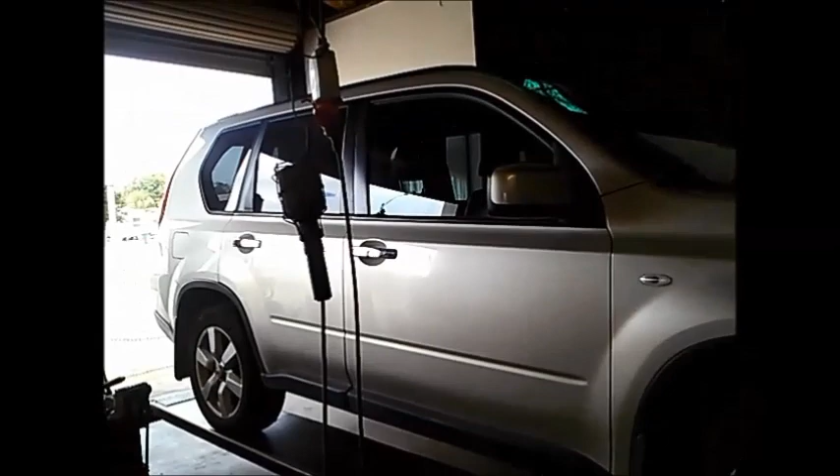Today we've got a Nissan X-Trail CVT transmission with a problem. It's sort of surging through the gears. It came in on the tow truck, so what we're going to do now is see if we can get any codes out of it.

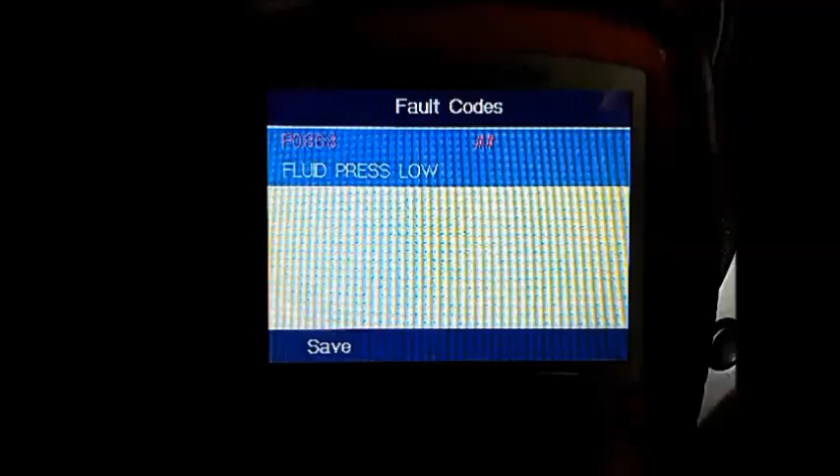The OBD2 plug is just here, next to where the fuse box is. And we managed to get a fault code, a P0868, fluid pressure low.

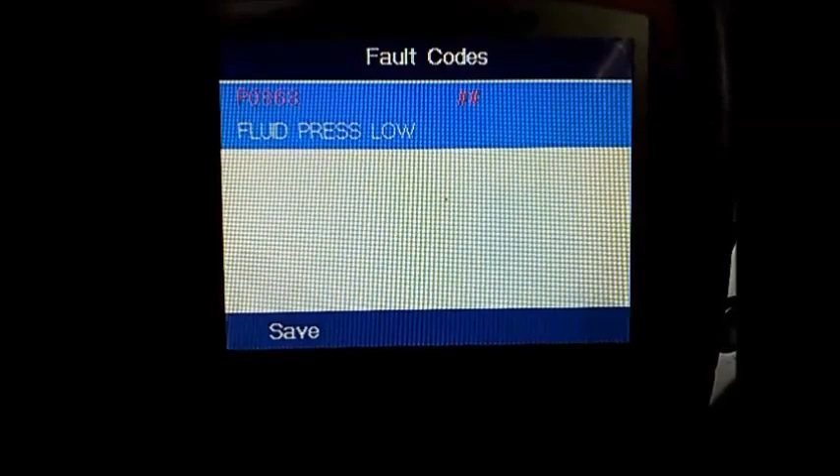Now to check the oil level on these, there's a little clip on the dipstick. You just have to press that in and then it'll pull out. If you're working on it, you just turn it by 180 degrees so it doesn't keep getting stuck in the little clip. When you finish the job, you just clip it back in. These also take a special CVT fluid in case you need to top it up. You can't top it up with any transmission fluid.

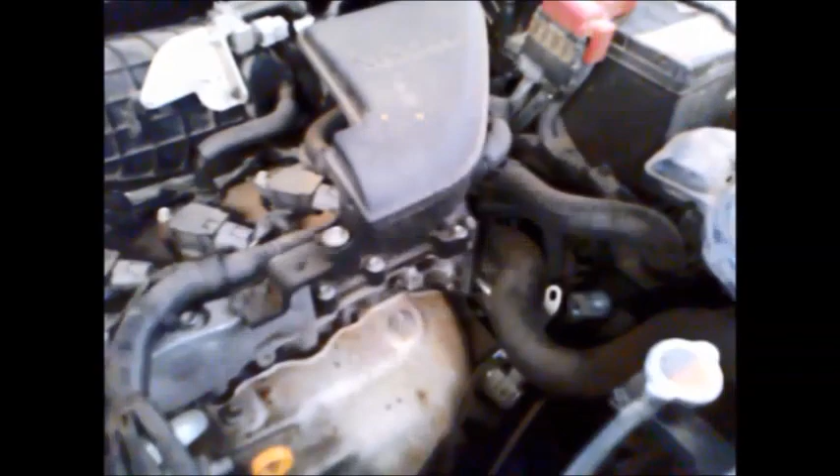Now just to show what's going on, it's a little bit hard to explain, but I can show you what it's doing. When it's under slight load, it's jumping through, so that's what's happening. Something inside is just pulsating instead of being applied constantly. So we'll just put that back into neutral, and in reverse we're getting the same problem.

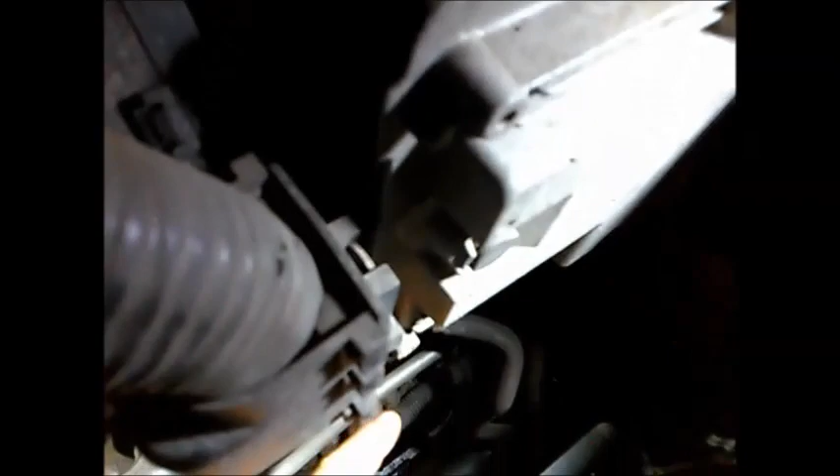So I've just removed the little cowling there for the air filter, and if you have a look under there, you've got these little bolts here. They're actually pressure ports where you can test the various line pressures, pump pressure, clutch pressure, etc. I'll show you on the diagram in a moment.

Just above here, it's a little bit hard to see, just where my finger is, that's the little oil cooler. It's a water oil cooler, so there's water circulating through there, and because we've got a code of low line pressure - there is actually a little filter in there that, because they're so difficult to get to, quite often gets neglected. If that filter is blocked, because CVTs create a fair bit of friction material, that's going to restrict the oil flow through the cooling line as well.

So before you go ahead and pull it out and all that, it's worth definitely dropping the pan, having a look at the inside of the pan, the condition, cleaning the filter there, and also just replacing that filter. You can do pressure checks there, but until you've done all that, you can't really test the pressures in it properly. So anyway, I'll just show you on the diagram what I'm talking about.

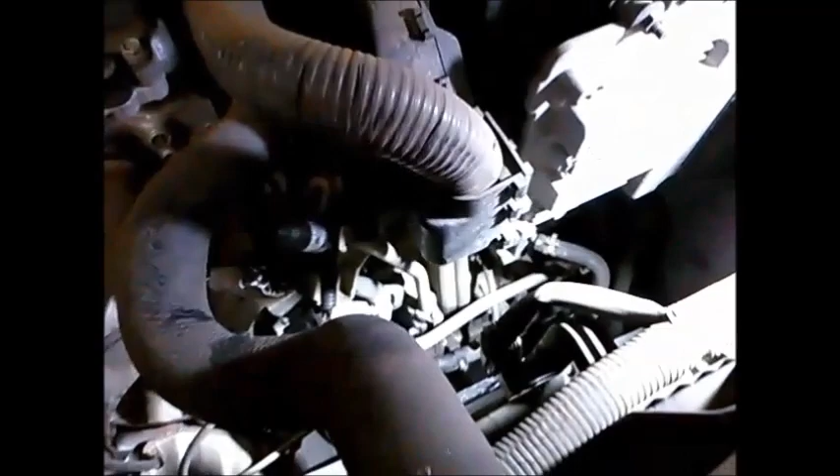Here I've taken the wheel off and just removed this plastic stone guard just to gain better access to this cooler. You can see there are 4 little bolts there, so we're just going to remove those and pull the filter out.

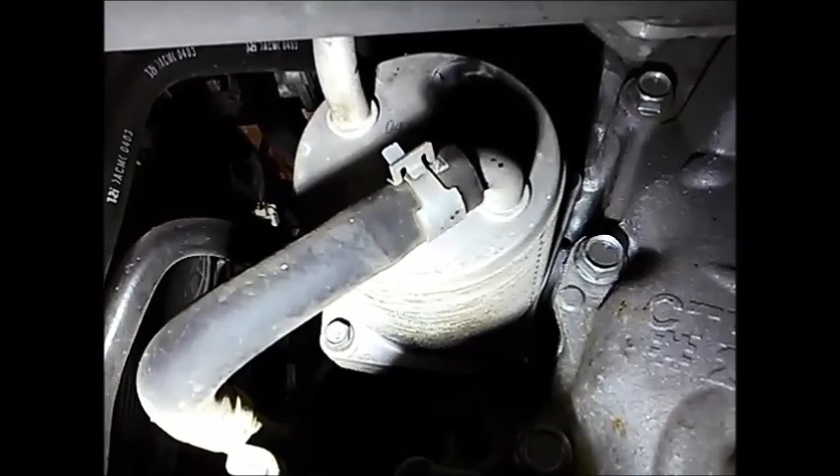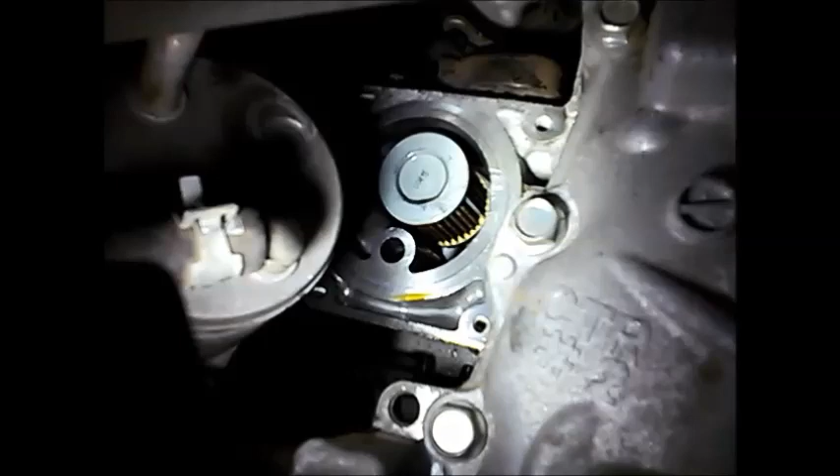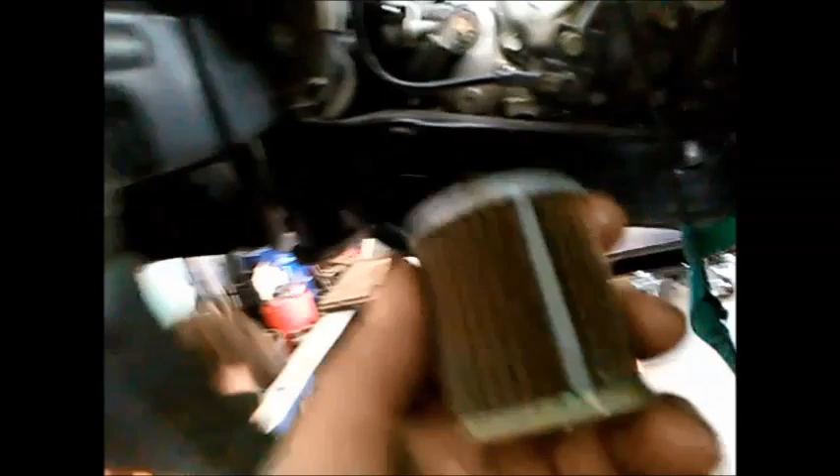There you go, just taken that off, and you can see the little filter in there behind that - there's a better shot of it - and that filter just pulls out. Just be careful not to damage those mating surfaces with a screwdriver or anything if you're fiddling with it, and make sure it's nice and clean before you remove it. And there we go, a little filter, that's what it looks like.

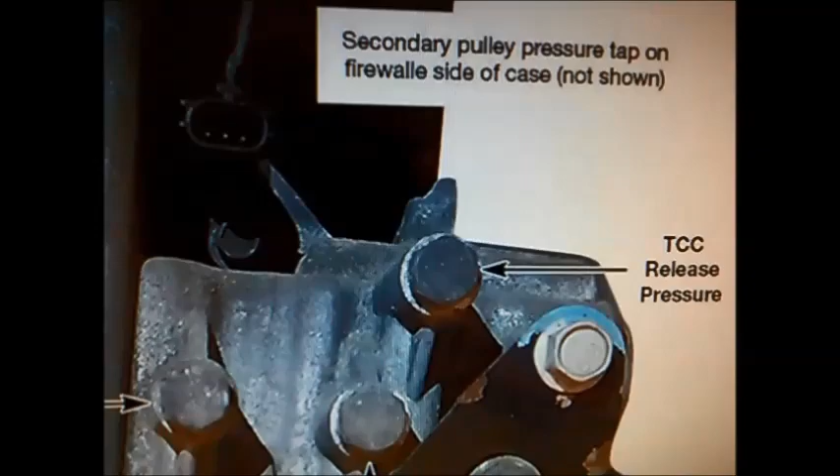Now here's the Sonnax website that you can look up yourself. You've got the line pressure one, which is that one. Forward clutch pressure, primary pulley pressure, torque converter clutch apply pressure, the torque converter clutch release pressure, and the secondary pulley tap is on the other side - you can see up here it says it's on the back side, or the rear side of the case. The reverse brake pressure tap's on top of the case. So that's the location of them, just for reference.

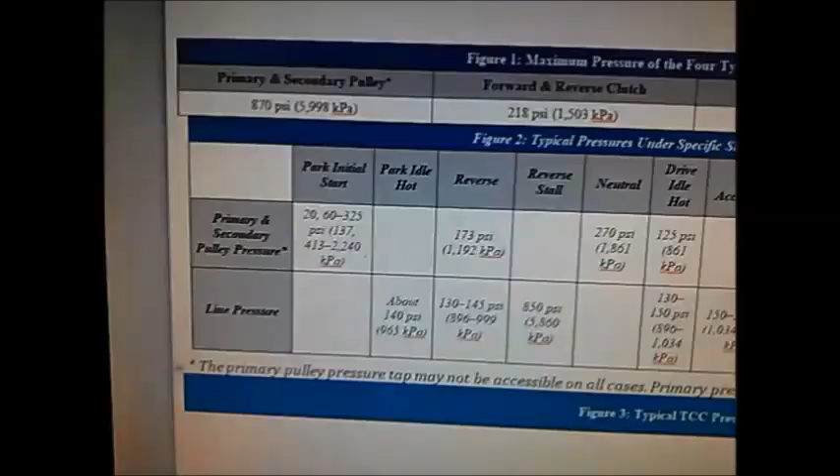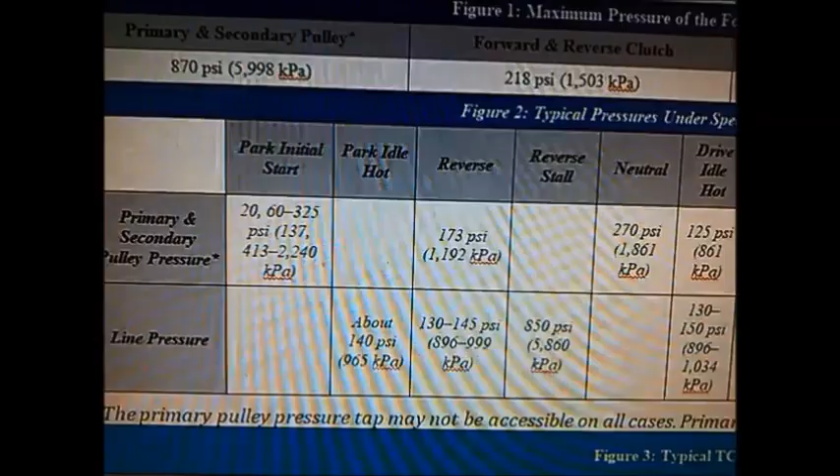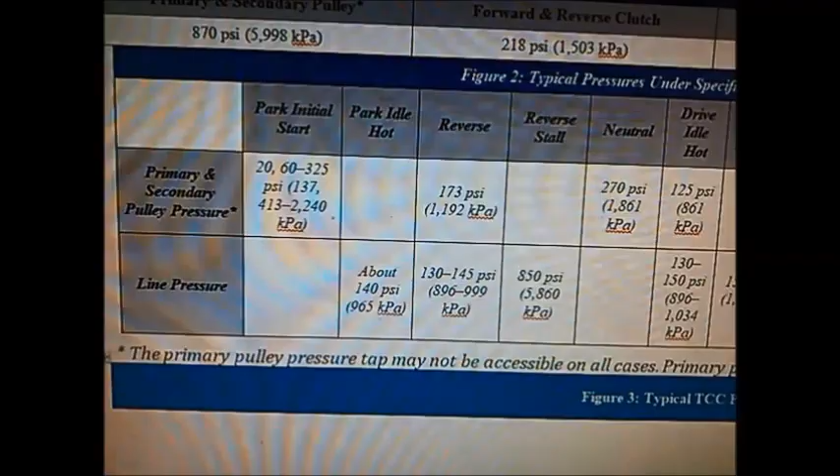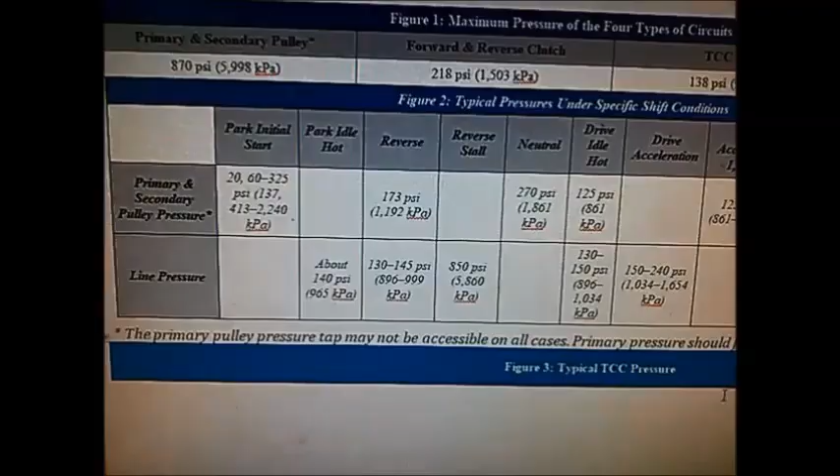And here we have the line pressures, and you can see if you do a stall test, which basically means you put your foot on the brake, put it into reverse or drive, and hold the accelerator flat to the floor, you'll achieve the stall speed of the torque converter, and you can see that the pressure there reaches up to 850 psi. So just make sure if you are testing those pressure ports that you've definitely got a gauge that can handle those sorts of pressures.

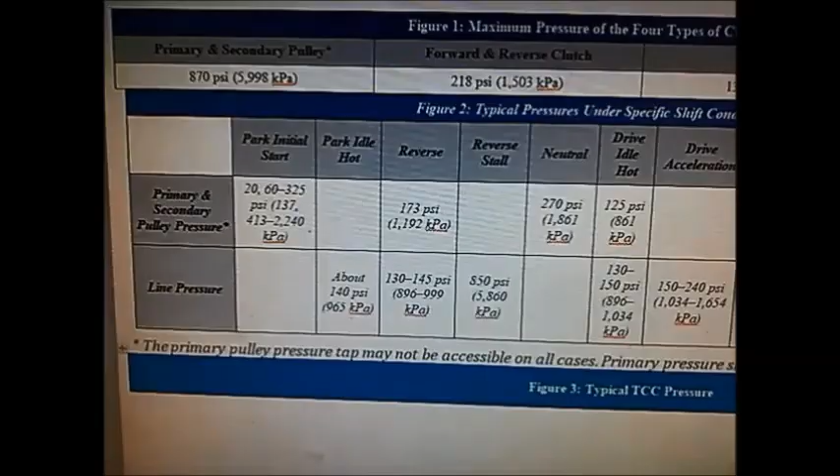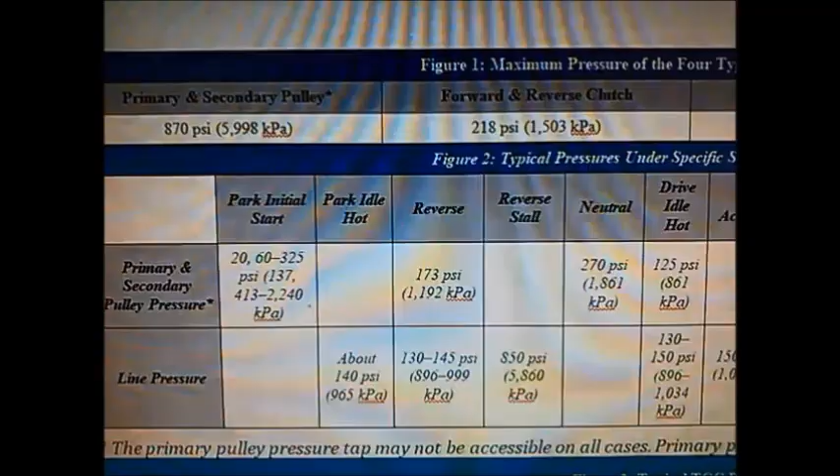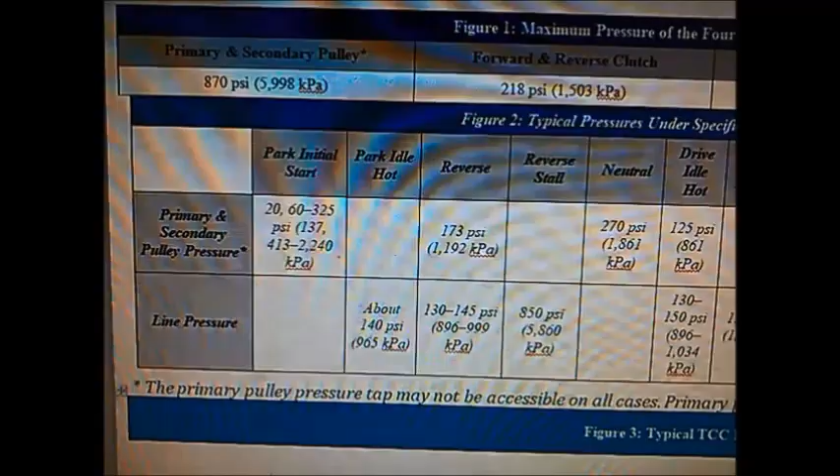It can be dangerous as well, so make sure you have all the protective gear and that. But anyway, you can see what pressures - the line pressure you should be getting about 140 psi in park at idle with the engine at operating temperature, and in reverse you should be getting 130 to 145 psi pressure just idling, and so on. So I'll just hold it still on the first section here, so you can freeze frame it if you want, or you can just go to the Sonnax website

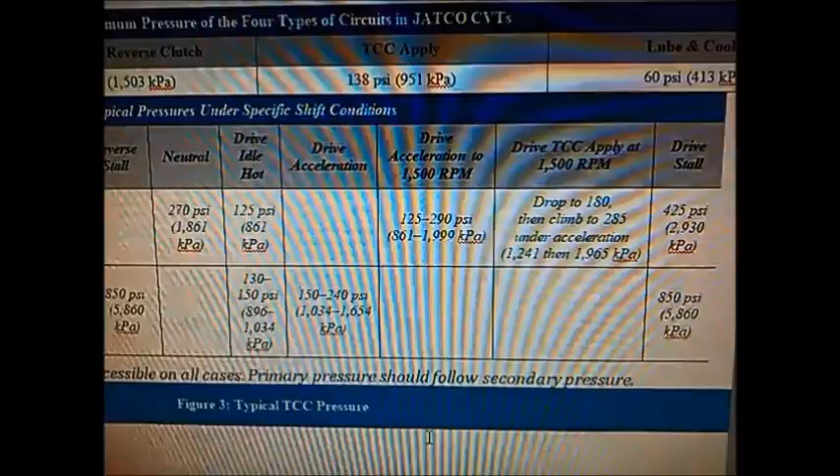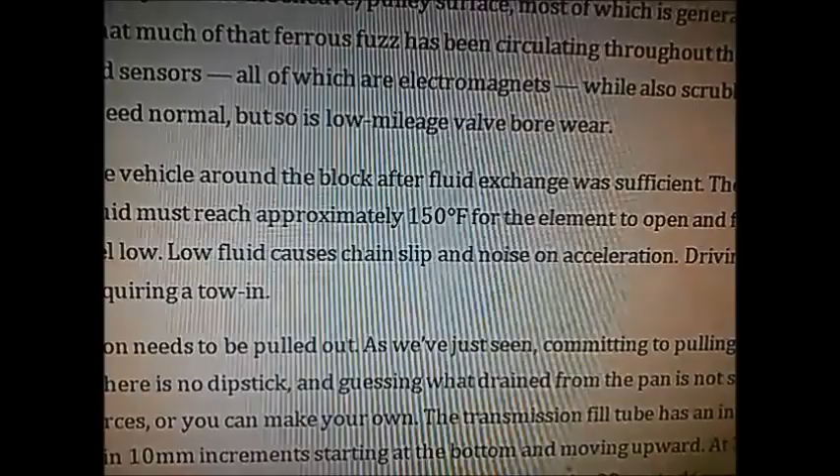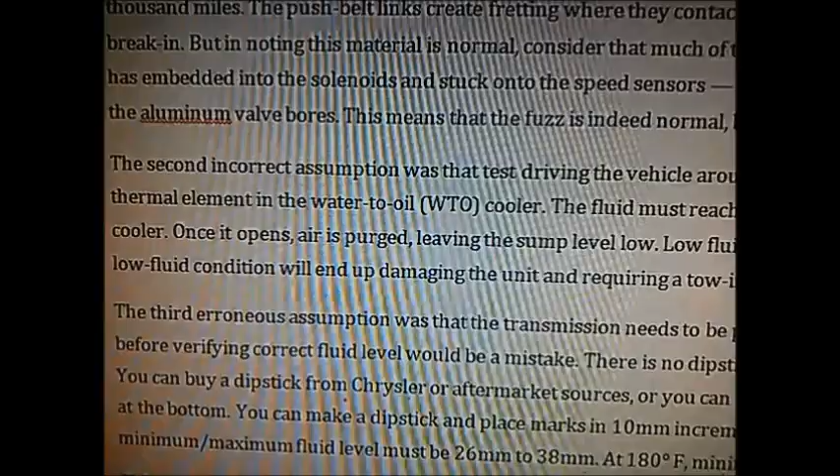and punch in this information as well. And here's also the information that I mentioned earlier, that the fluid must reach 150 Fahrenheit, or between 50 and 80 degrees Celsius, to open the element in the cooler. So you purge all the air out of it. If you've done an oil change or anything like that, you've got to make sure that is done. So you've got a few little things you can check before you start pulling the transmission out anyway.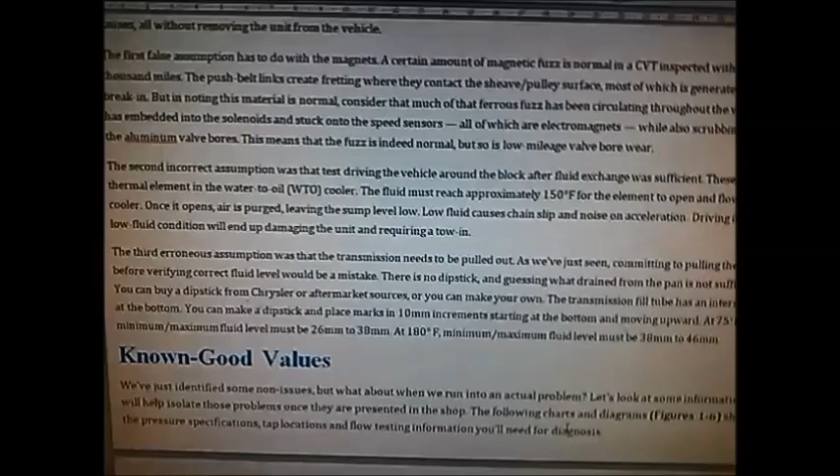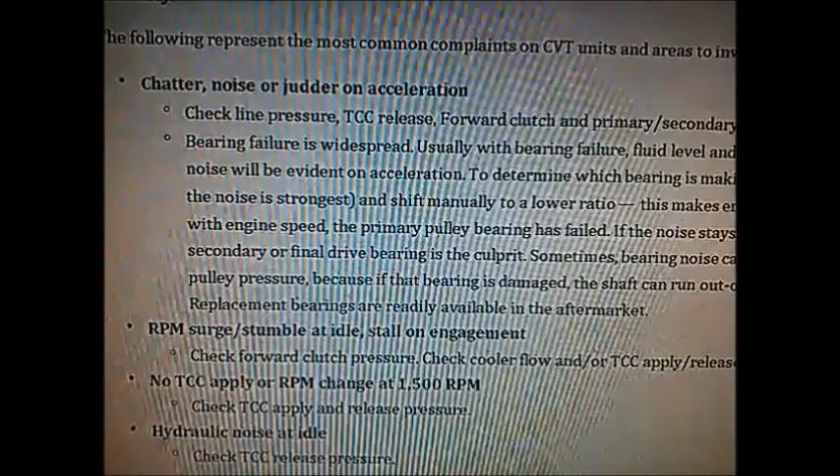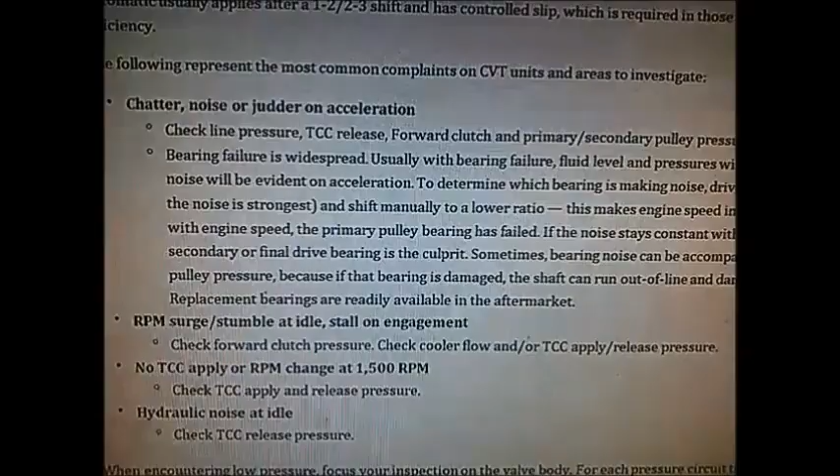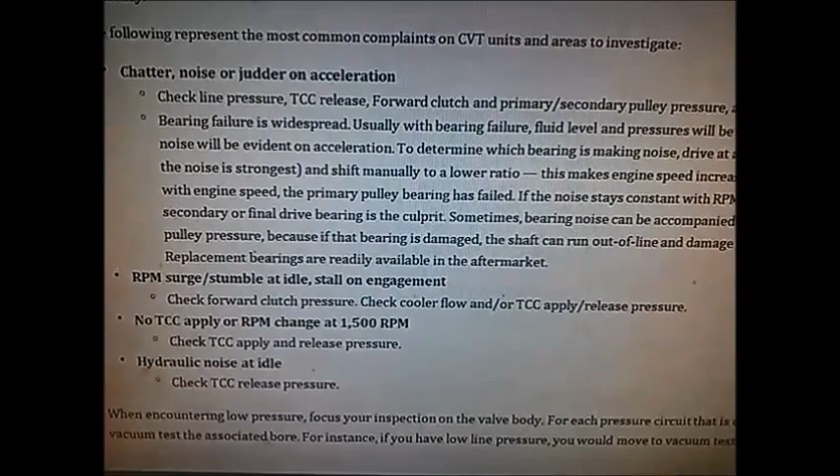Anyway, I hope that's helped. We're going to go ahead and do these checks and see how we go. And here again, you've got diagnostics information that'll tell you to check certain things if certain situations are happening. We've got this judder on acceleration under load, so it tells you a whole lot of stuff. Basically it tells you to check everything, but until you've checked those filters and made sure the cooling line has a good flow, all this information is sort of irrelevant. So anyway, I hope that might help you fix your CVT problems if they arise.

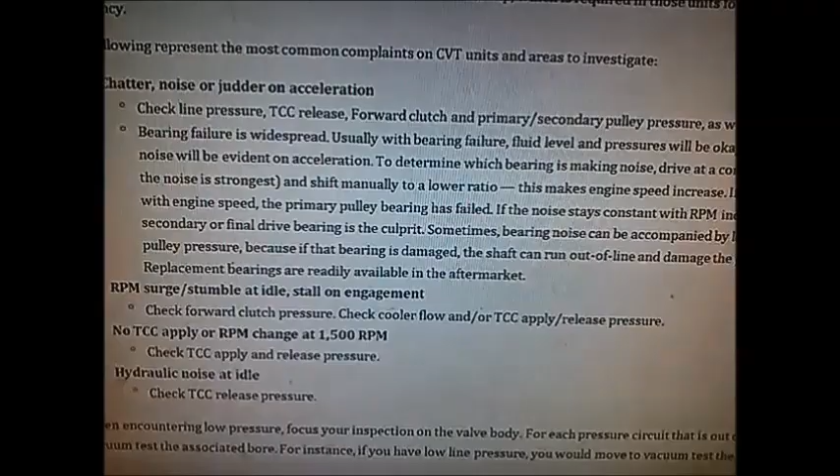Thank you for watching. Okay, so we've tested the pressure in it. The pump's notorious for getting worn in these transmissions, so we're just going to go ahead now and remove the transmission.

Take these out. And those. Those. And these out. And these two there. Blah blah blah blah.

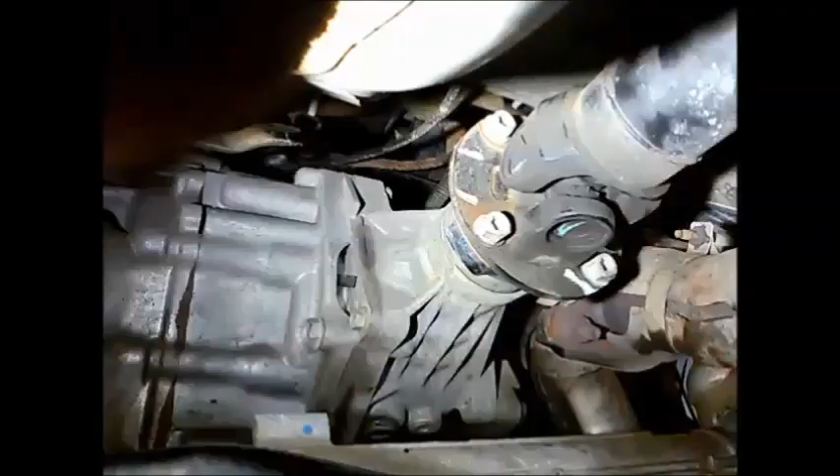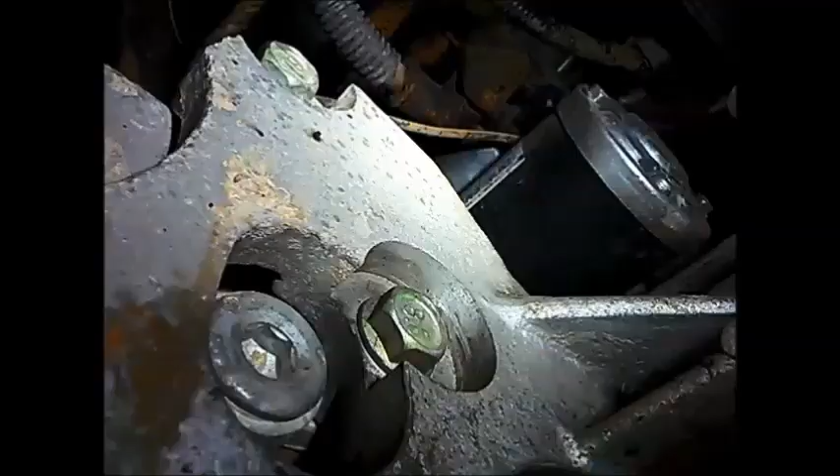Now we took the top starter motor bolt off, and there's two more, one there and one there to take off. The filler for the transfer case is actually in here, and the drain plugs are here.